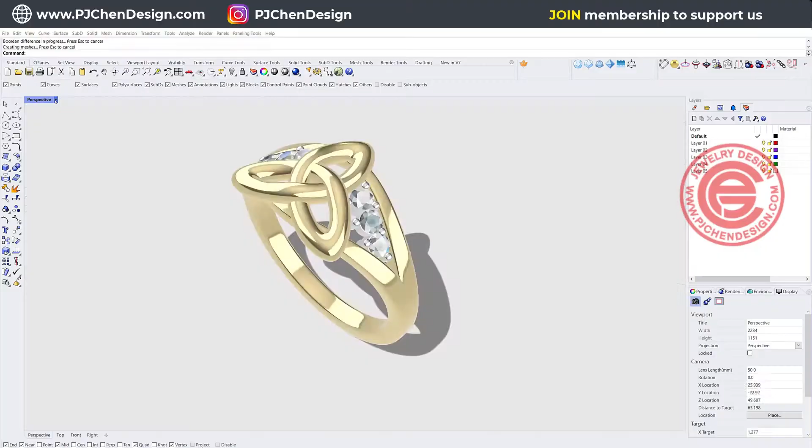For this ring right here, we have the top portion and also the ring shank portion. The top is going to be done by the SubD. The bottom split ring shank is going to be done with the basic Rhino NURBS surface. So that's starting from scratch.

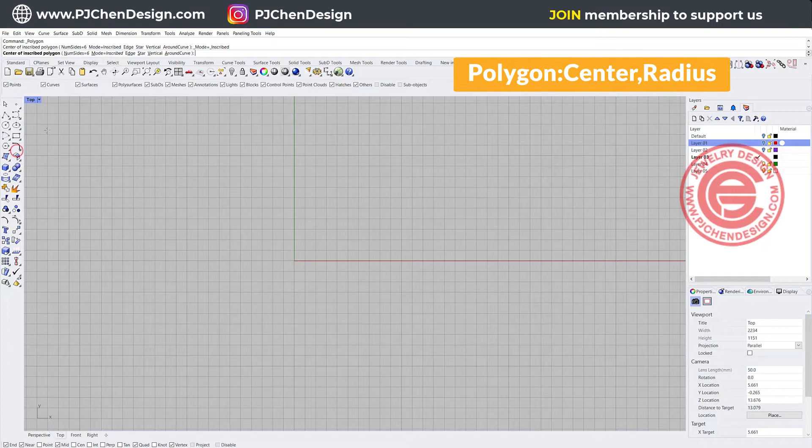Let's come into the top view and use the command for the polygon. On the top right here, the number side, we want to change to 3 for our pattern. I'm going to snap into the 0 to start it. So it depends on how big you want to have your piece. This is just for our reference.

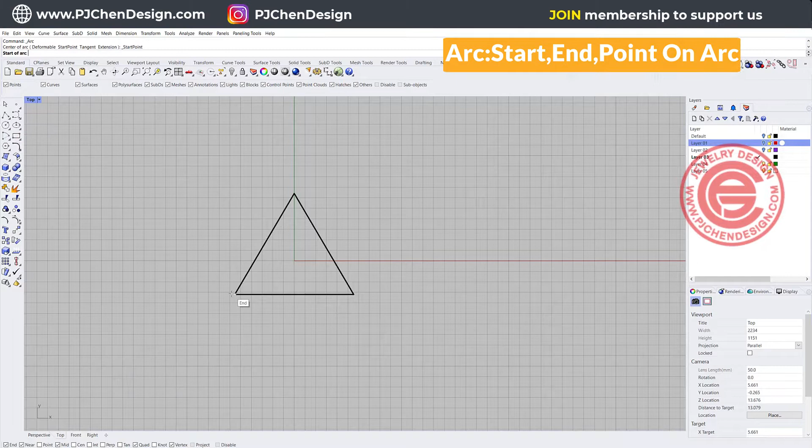Then I'm going to come in here and use the arc tool. You have the start and end point for the arc. I'm going to snap into the end point here and end point right here and move in depending on how you want them to be. So that's it, this is the curve right there.

Once you have it, give it a test by mirroring that curve to the other side and see if you like the proportion. If you do like it, mirror again from here to the midpoint, and then we have that triangle area. If you like the proportion you have, you can use that. If not, you just need to move things around to get the best proportion.

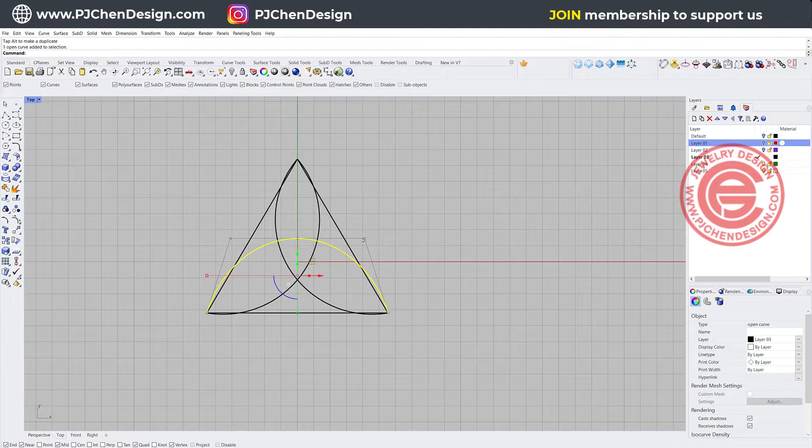In fact, I do like this, it's more intersected into each other, so I'm actually going to delete those two, this one and this one. I also need to redesign this one a little bit later, to make it a little bit puffier, and at the same time I'm going to rebuild this guy to be 7 points and make sure the degree is 3. Okay, so now I have that one.

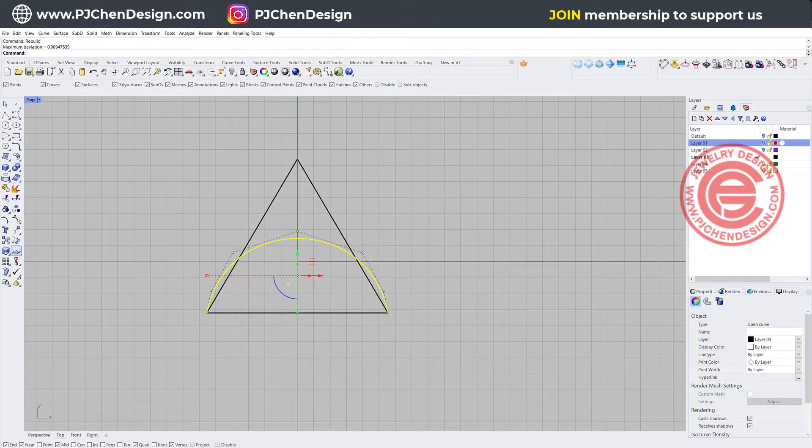I just need to mirror again. Let's go ahead and mirror this guy to the midpoint right here, and again mirror this guy to the midpoint. So actually my Celtic knot will be a little bit fatter compared to the one we just had. So let me hide this triangle.

Once you have this, let's take a look at the perspective. I'm going to turn on this one, and I want to pick up 2 control points right here to make this one a little bit higher.

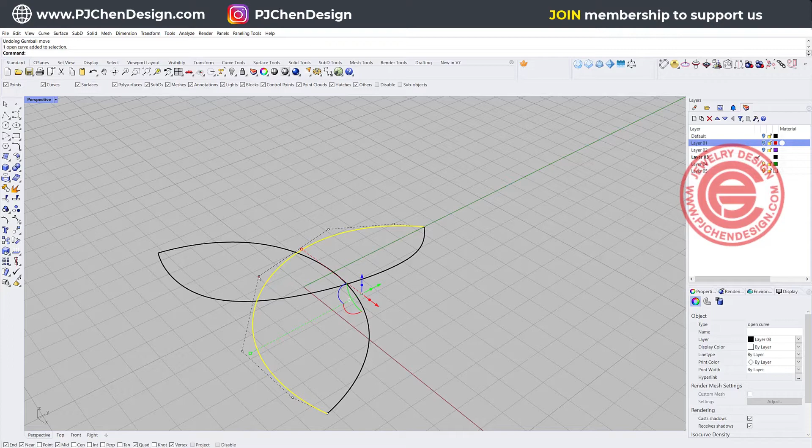If you want a specific number, you can just type the number, say 1, so you will move up 1 there. At the same point right here, this one and this control point, you want to move up 1 as well. And then once you come back, this one is higher, going lower, coming back here, and then this one and this one we want to go higher as well, so that goes 1 like this.

All right, so they are kind of intertwined into each other, and we are going to use this SubD for this. So let's go ahead and pick them up.

A lot of times students ask me, does this have to be the SubD curve? Not necessary. If I turn them into the SubD curve, let me show you.

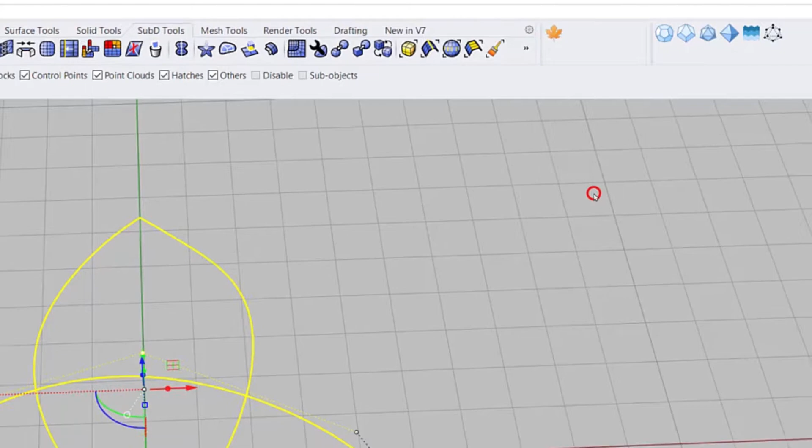We're going to come into the SubD, and right here you have 'make SubD friendly,' and you're going to see them like this. You're going to see 1 more point right there, and that'll be fine. But if you want to do that, make sure you do it without joining the curve.

Let me show you why. If I have this, and then I use the join command to join them first, and then I come into the SubD to make it SubD friendly, you're going to see they are a little bit warping, and then you have this one pointed while this one is rounded, and this is not what we're looking for.

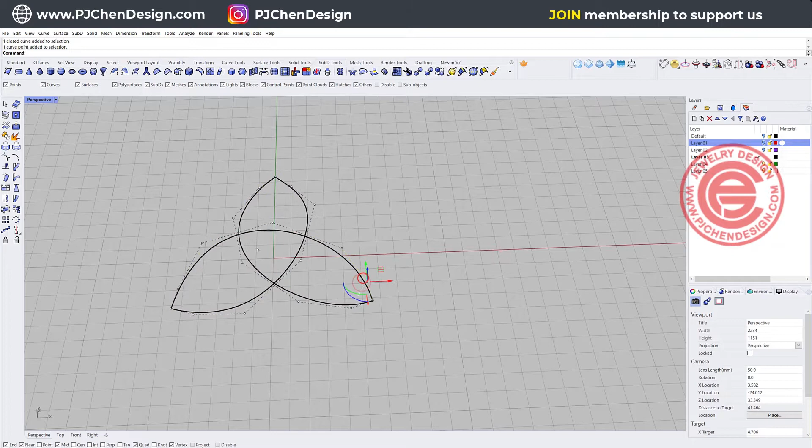Make sure you are not joined if you want to turn them into a SubD curve. I'm just going to explode it and try with the SubD curve. Come to the SubD and then make SubD friendly. This shape is slightly different, but I'm going to pick up everybody and use the SubD command for create SubD multi-pipe.

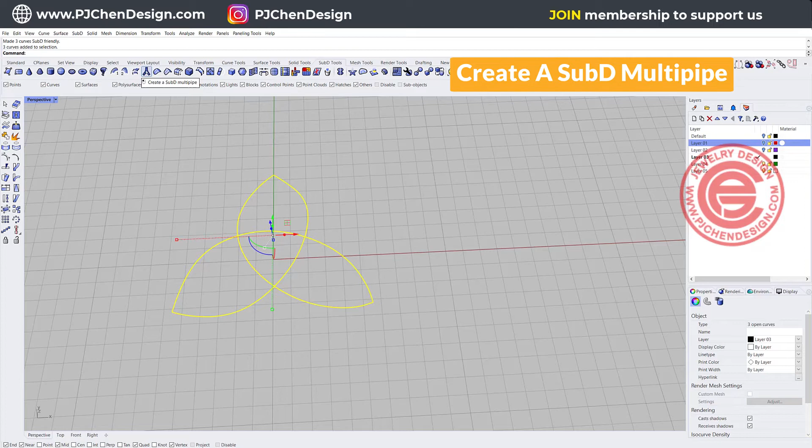I'm going to set the radius for 1, and then I want to round end it. It's actually not much of a difference here because it's connected, it's not open ended, and I want to set it for 0 for the smooth it, and you can go in between 0 to 1. So I'm going to type it 0 here, and then we'll get something like that.

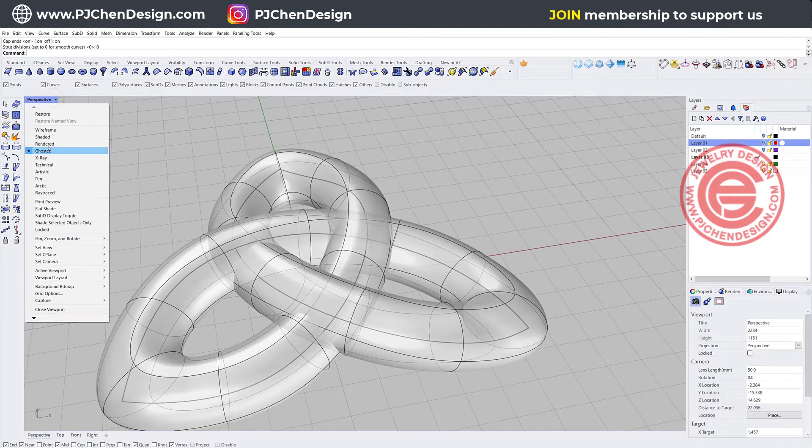Notice that in certain areas, it should be higher, it should be lower. Now, if you don't like what you see there, and you want them to be more pronounced, let's take a look on the render view right here, and then you want them to pop up a little bit more. Here's what you can do with the SubD.

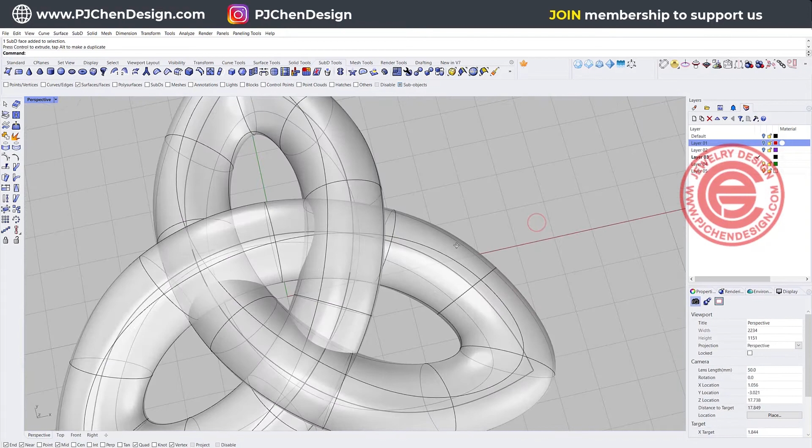I can come into the selection, I'm just going to select the face. So I'm going to select this face, and also this face. So they are the highest spot right there, and I'm just going to bump it up, and then there will be something like that.

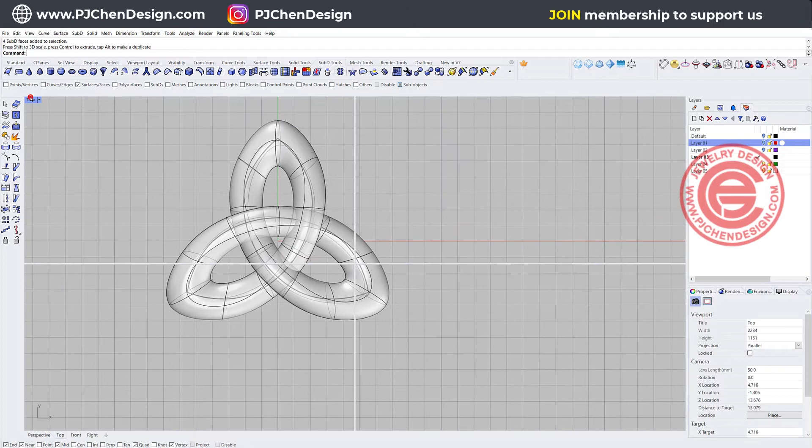Now if you take a top look at this view, and then you feel like, maybe I want them to be a little bit thicker right here. For example, I'm going to pick up here with all the faces, and I just want to 3D scale it up, try to give it a little bit dimension, and then we'll get something like this. So take a look on the render view and see if you like the shape. For me, they look all right.

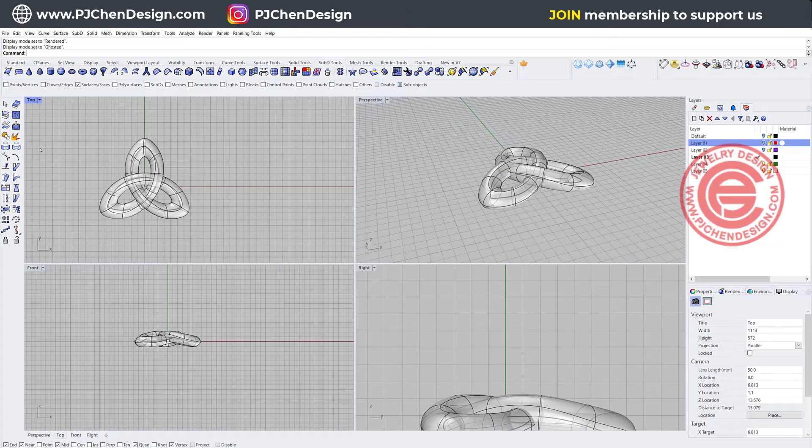So I'm going to stop it right there for this twisting, and it's super easy to do with the SubD. If you are not having a Rhino 7, I believe you can still find a similar program like T-Spline from Autodesk to use. They are really similar. If you are using the Matrix, I believe they are called Clayoo, and it's the same thing.

I'm going to create a ring for the ring size of 16 millimeter as my diameter, and I'm going to move this to the top. I'm going to hide all the curves just using the hide command.

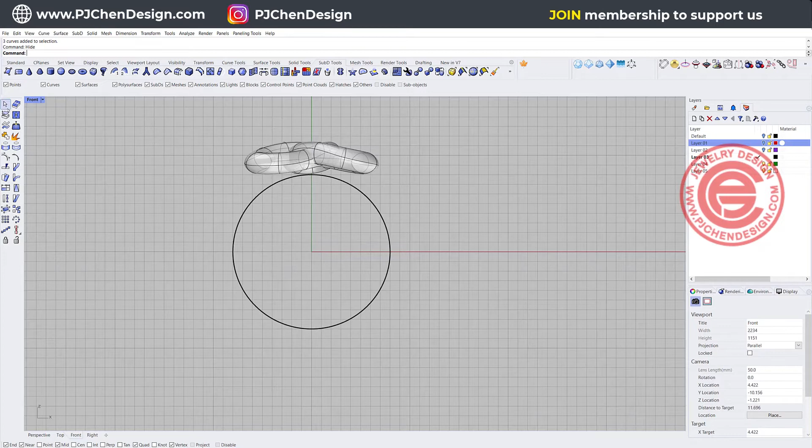Now we need to make a split shank, depends on how you like to split. Well, first of all, I like this one going right in the middle, so maybe I want to move it back a little bit so I get an even distance like that. Or you can just use the align tool to align vertical and just type it 0. It will be right in the middle there.

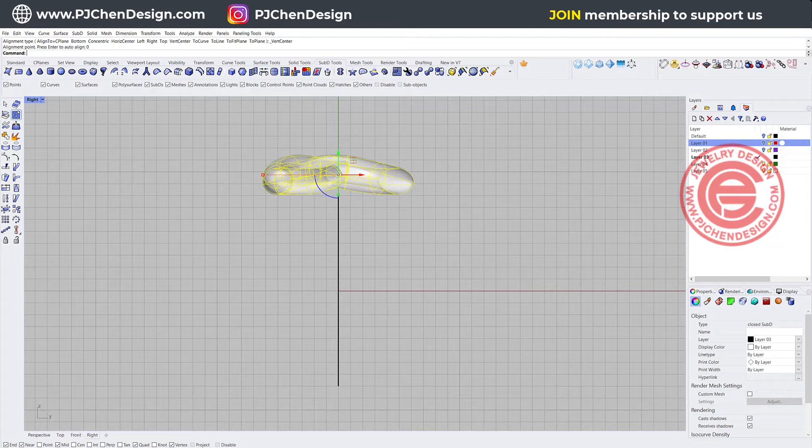The second thing is I need to draw another curve. This curve is going to come from the bottom, coming over here, and I want them to split about right here and pass the point here, so I will have that opening right there. If you take a look on my side, it may be snapping crazy right there.

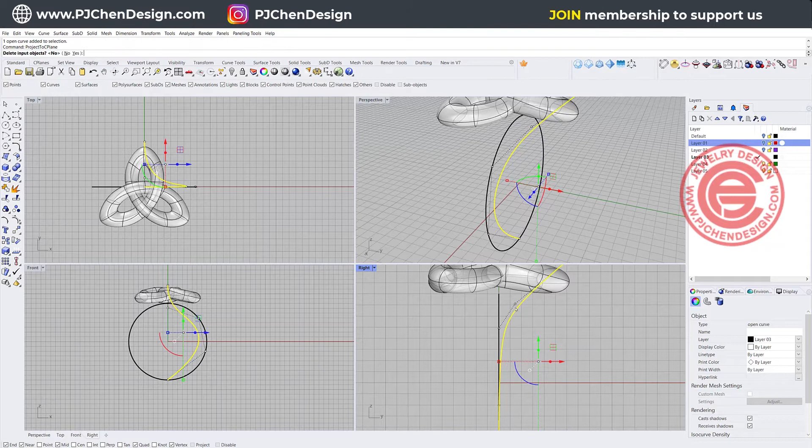To fix that, coming into the right view, just type project to C plane. This is the command we wanted to use, and we want to delete the input, so then there will be a straight line.

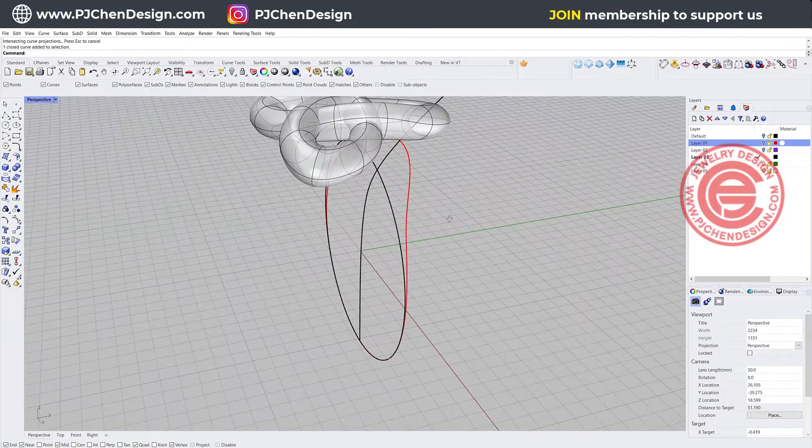Once you get the straight line, we are going to use the curve from two views to create the ring shank curve. So you got the first curve, you got the second curve, and then this one, I'm going to mark it into the red color, and this is the curve we are going to use. Then we need to create the profile and double check if this is the location that you want.

If not, you might need to move things around. I just noticed that my piece might be too wide, so I actually want them to be a little smaller to be more graceful. All right, so now I have something like this.

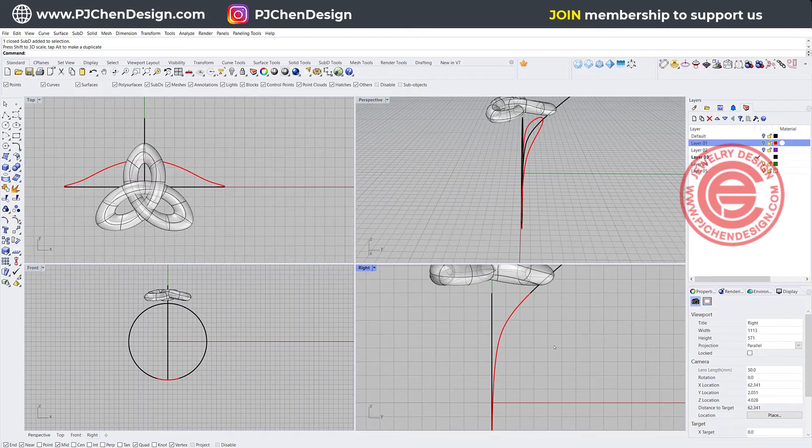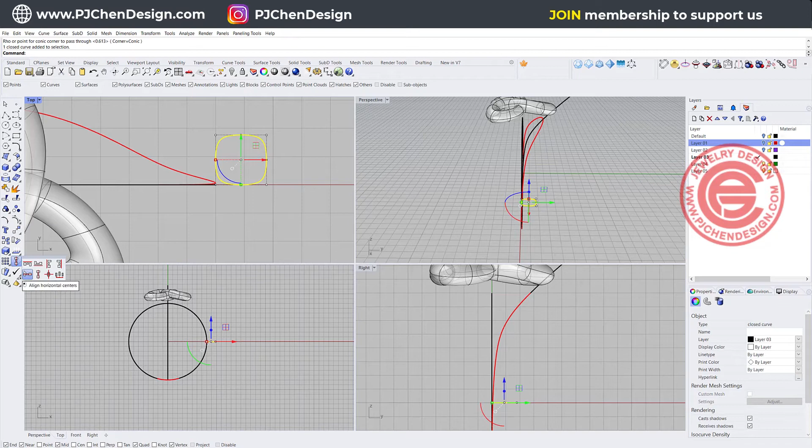I need to create the profile, so let's go ahead and come over here. I'm going to use a round rectangle with the conic corner, snapping into the quadrant or endpoint right there, to create a ring shank, something like this. Once I create it, I'm going to move it back to the center, simply using align horizontal center and typing 0 right here.

Now I also need another one for the other side. So I'm using a mirror command, snapping into the 0, and then we get something like that.

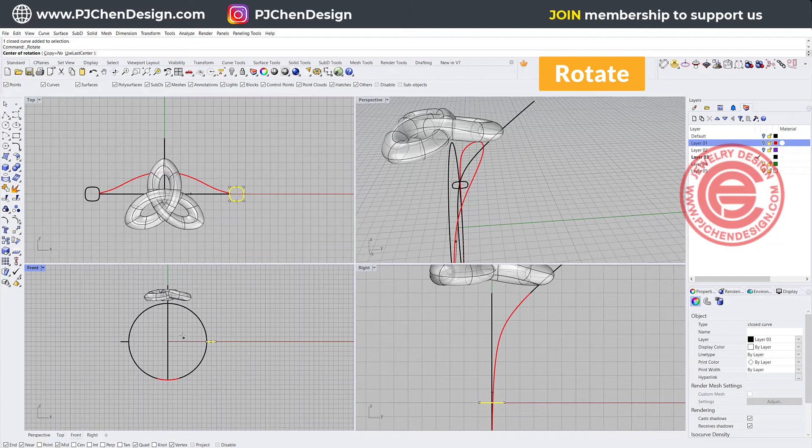All right, so that's no problem to create a ring, but I do like the ring to be a little bit tapered on the top. So here's what I'm going to do. I'm going to use the rotate command and snap into the 0. Make sure copy equals yes on your command bar, then hold shift, click here, and also click here. So then you will have a copy there.

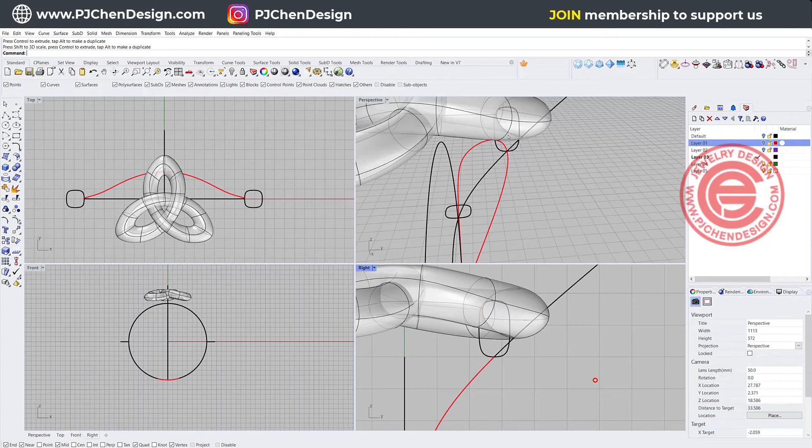Now we need to move this copy close to our shank right here, and then I do want them to be a little bit narrow looking on the top. I want to make sure that it intersects and is hiding inside right there.

Okay, now if that looks okay to you, let's go ahead to sweep. We want to use the sweep one rail, and we're going to click on the rail, then click on the cross section 1, 2, and 3, and let's hit enter.

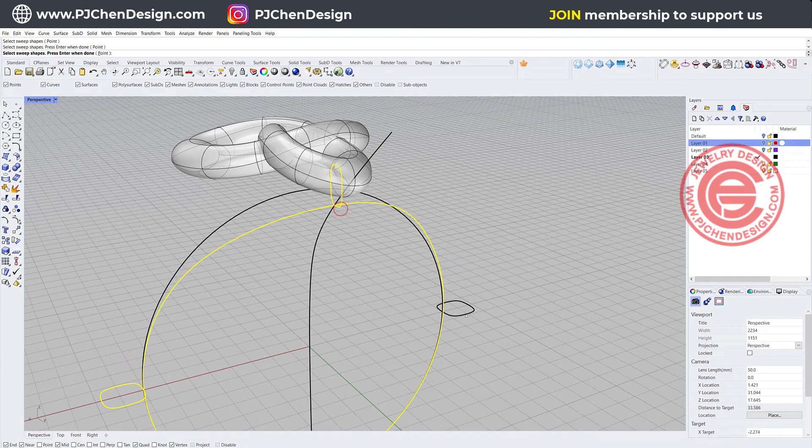One thing to keep in mind, you want everything aligned to the right place. So align to inside of the ring shank here, and align here for inside of the ring shank, and the one on top, this is inside of the ring shank right there. All right, and they are facing the same direction to the left, and let's hit enter.

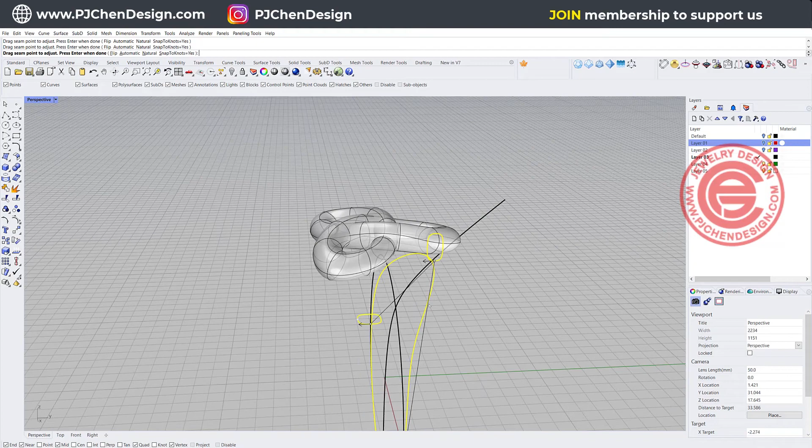I also want to record a history just in case I want to change things. All right, so then we have this.

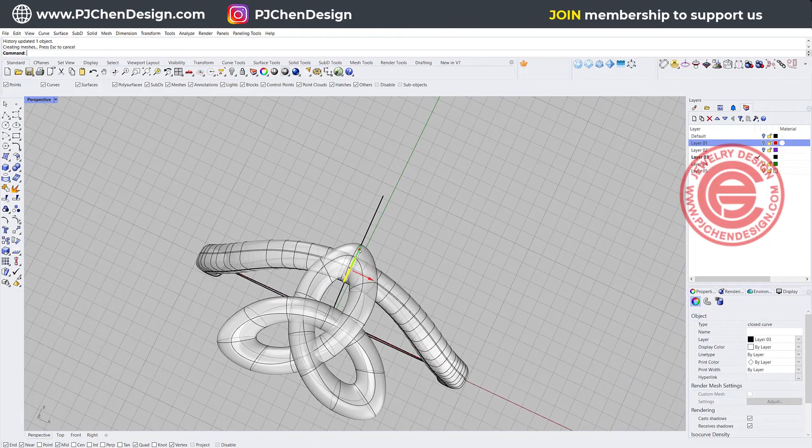Now I'm looking on the top, maybe I feel like this is not wide enough, it's getting too narrow, so I can change it since I recorded the history there. Or I can move it to the side so I don't have to see that one there. Okay, and then I'm also going to mirror to the other side using the command for mirror, snapping into the 0, and then I'll have something like this.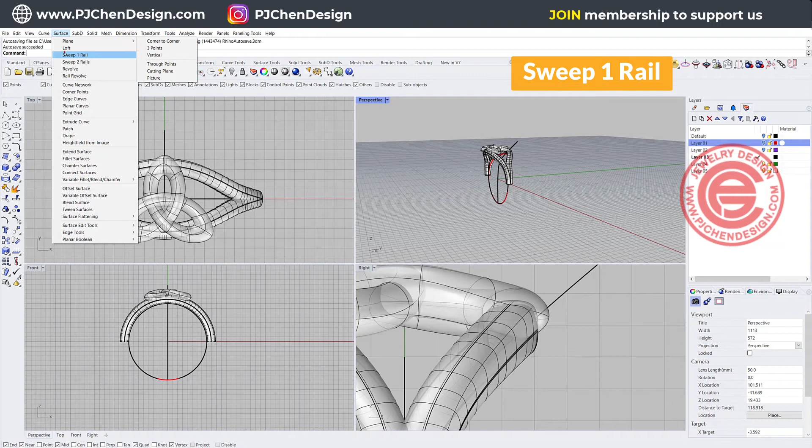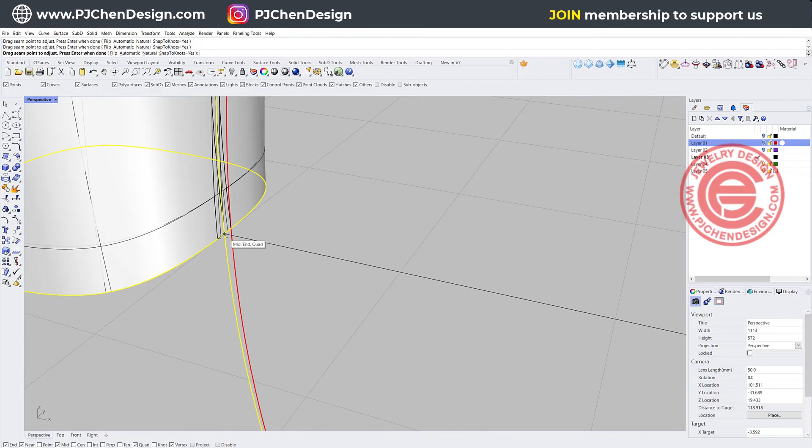Okay, the bottom of the ring shank, we are going to use the sweep as well. So let's go ahead and use the sweep one rail, pick up this rail, and also pick up the curve, and also this curve right here. To make sure the seam will align perfectly, we also want to move to inside of the shank right at this point, and also move it inside of the shank right at this point. All right, so then we're going to hit enter to create the bottom of the ring shank.

All you need to do is cap all of them and boolean union together, and then we'll have something like that. If you like it, you can even do a little bit more design, fill up the space with the stone setting, and I have a lot of videos talking about this type of stone setting.